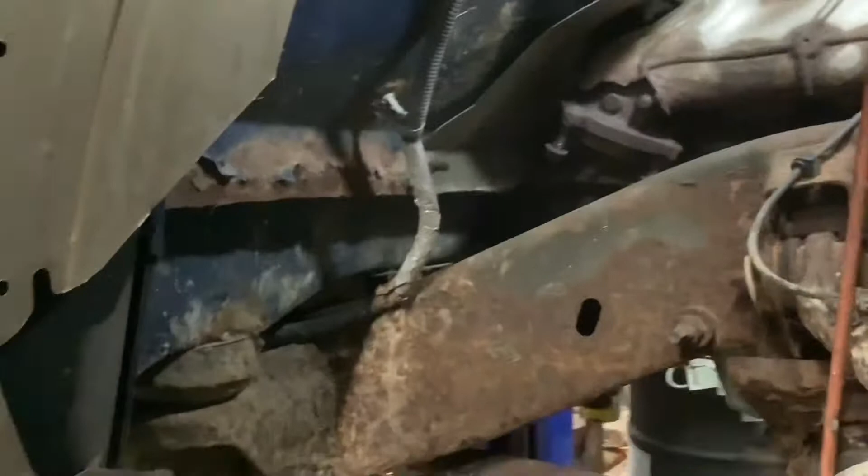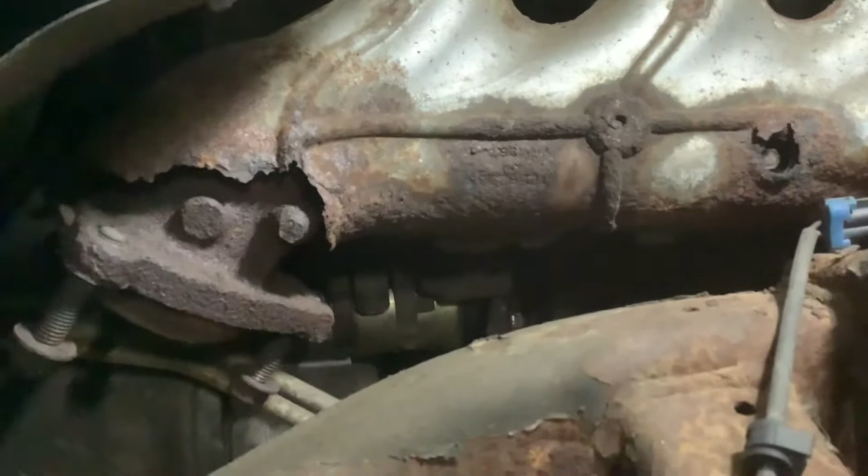Okay, here we are back with this 76,000 mile Michigan truck. I took this inner fender well out because it's easier to get to the starter. I got it up in there and the wiring is very tight, so I prefer to put the starter in and then hook up the wiring. You can see that stud is empty right there and the nut is loose.

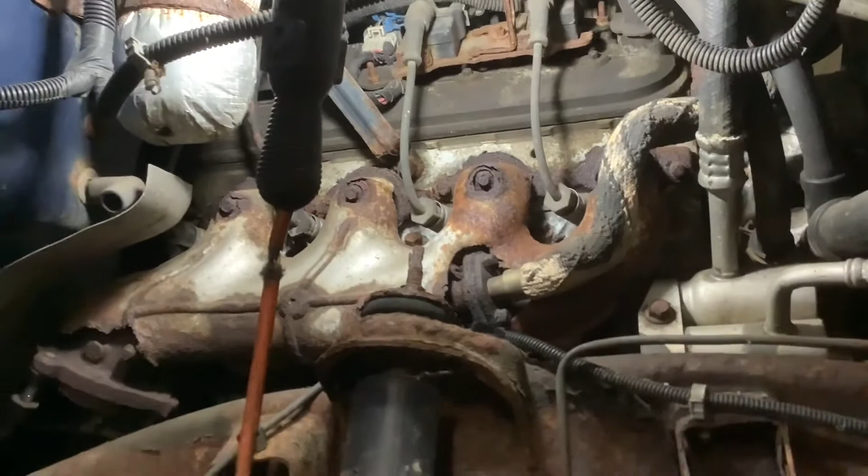I decided before I pull that rear end and swap it with the one sitting on the floor, I'd like to get some fluid in the transmission and start this thing up to do a baseline on the rest of the truck. Remember there was an idler pulley on the belt drive making noise, and who knows what else might go wrong. So I just want to get this thing started, let it run for a little while in the shop, and see how it goes. I need the starter, the exhaust put together, and fluid in the transmission. I'll check all the fluids in the engine, coolant, oil, stuff like that, and then we will get going.

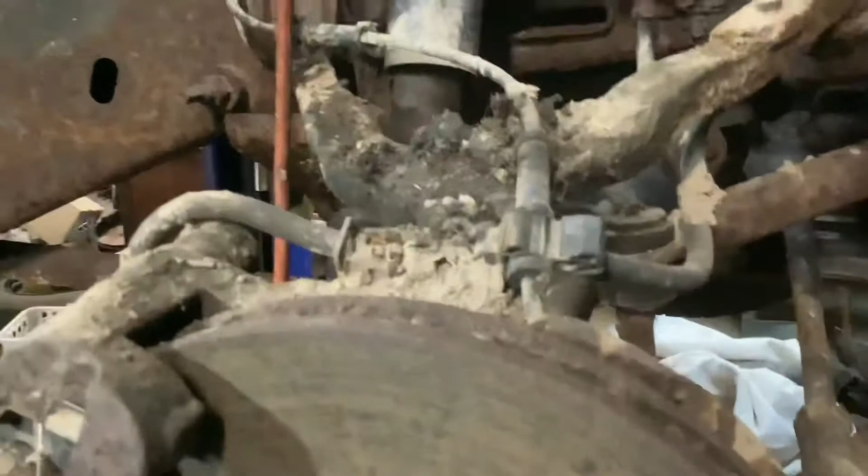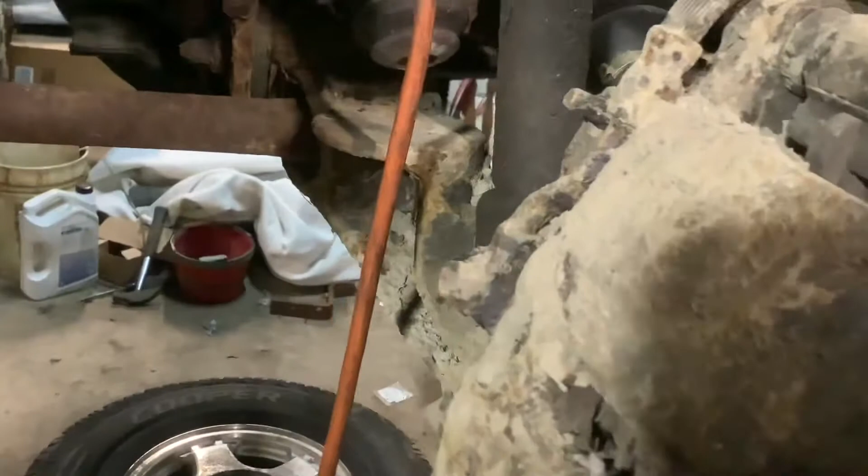I did mention that this truck was out in the field one of the last times before it was parked, and I probably should have washed all this mud off. The bleeder screw is gone. The brake hose is in poor shape, and I will replace that at a minimum before I even try to drive this on the road.

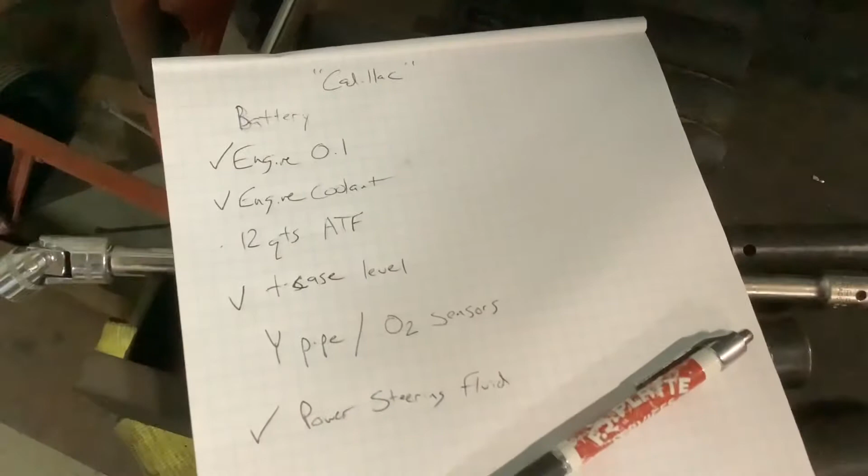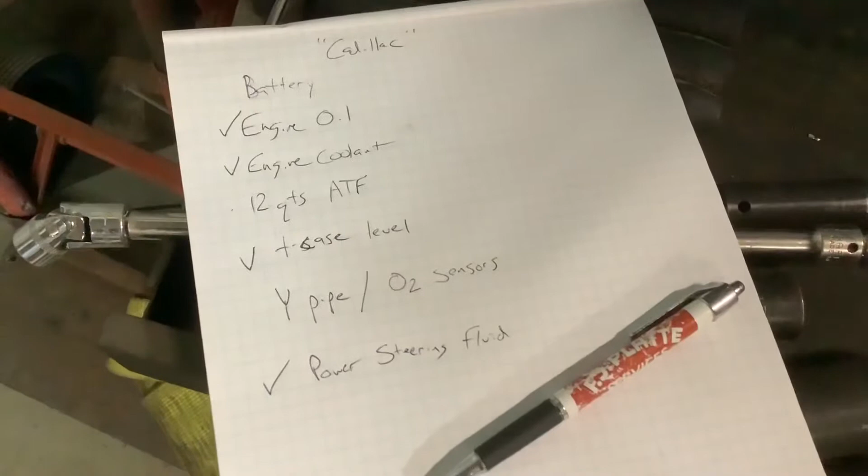So that's that, and there we go. There's my list of things to do for the Cadillac. I've got to do the battery, check engine oil, check coolant, put in the transmission fluid, check the transfer case level, hook up the exhaust, check the power steering fluid.

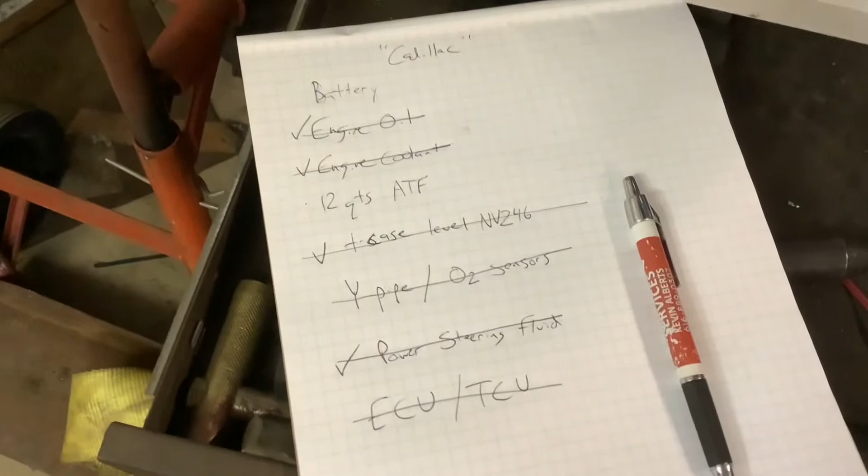I have 8 quarts of transmission fluid in it, and I have to put the battery in and see if it'll start before I finish filling the rest. I want to be able to burp the system and not act like it's over full trying to pump it up.

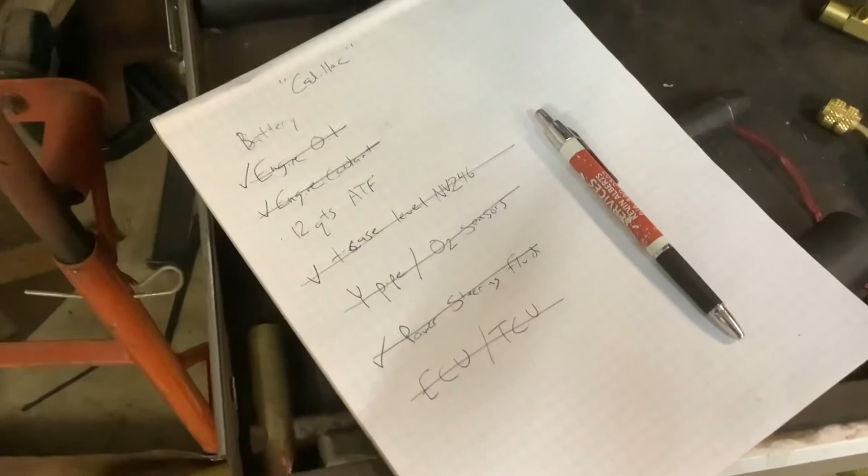All right, this is the moment of truth. The battery's hooked up, and so far there's no evidence that mice have totally trashed the wiring, because I heard a click inside, but I didn't hear anything scatter or any smoke going out. So it's time to crank this thing over and see what happens. Wish me luck.

Well, that wasn't the smoothest running engine I've ever heard, but it has been sitting for a very long time. I didn't have any check engine lights or anything like that, so I'm going to check the fluid level, top it off as needed, and keep going at the project.

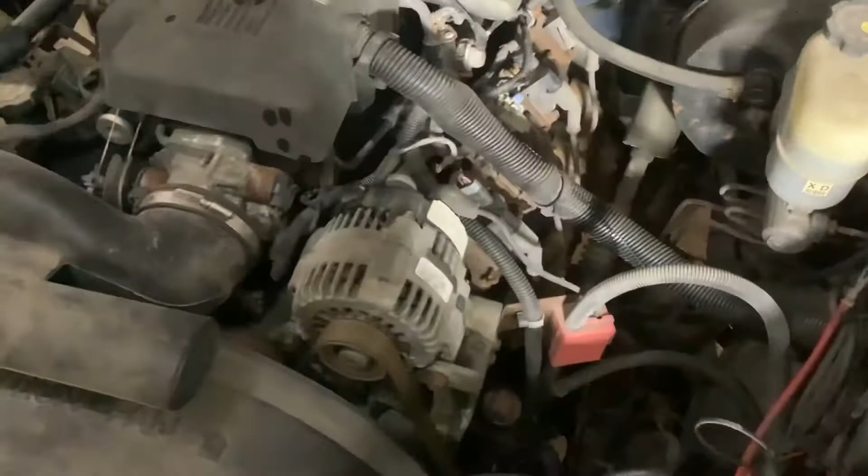Well, all that noise when it started up the first time was because this outside manifold bolt is broken. Now that it warmed up a little bit, that noise went away, and I'll most likely add a set of JBA stainless steel shorty headers to the list of things to grab for this in the long run.

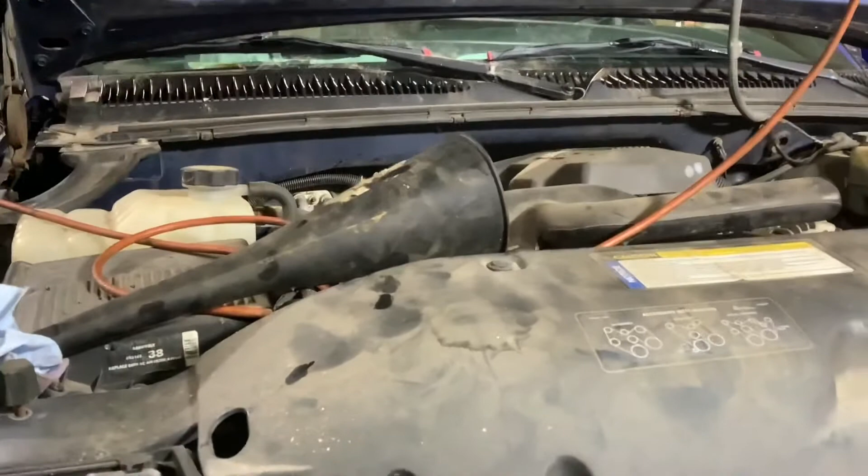Well, it ran long enough for me to get the transmission topped off, and all is well with that. It's starting to get a little stinky in the shop, so I'm going to wrap it up for the night and get some fresh air.

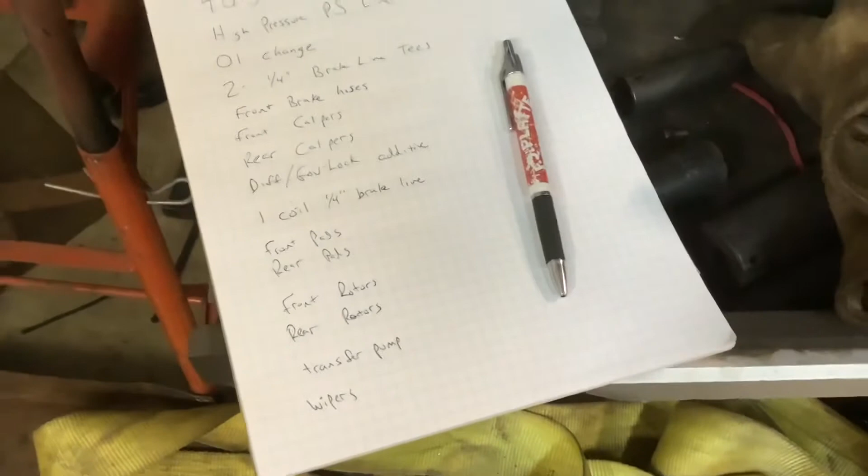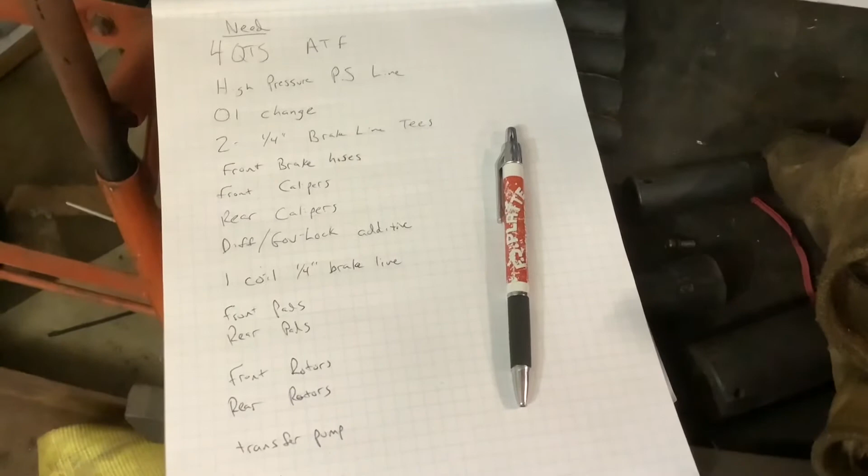I made a short list of things that I need to grab for this, and some of it is necessary, some of it is just because I would like to. The pads have good wear left on them, but I'd like to do new calipers and new rotors, so I might as well just do the pads too. I have a leak on the high pressure power steering line, and just some maintenance stuff needs to be done. Otherwise, this is looking promising.

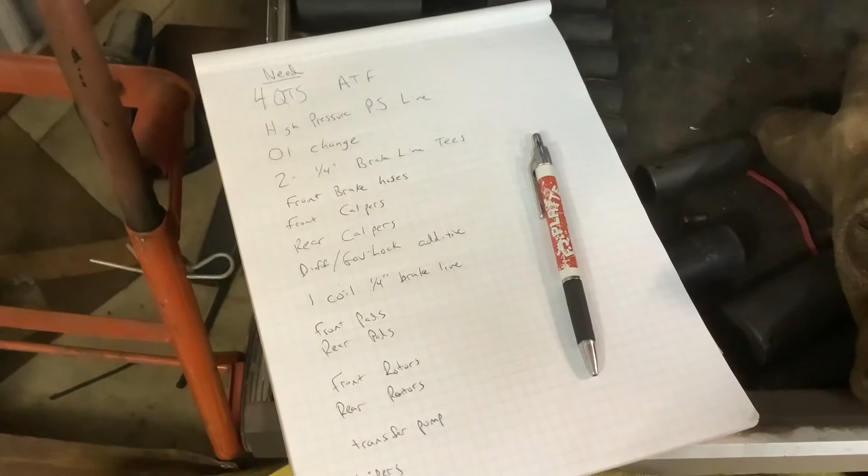I'd like to get this thing wrapped up in the next week or two, and have a spare truck with a plow on it for the winter. I do have some brake components here that are labeled for an Avalanche, an 03 Avalanche, so I'll do some cross-referencing and see if these will fit this truck as well, being a 99 half-ton Silverado. That would make things a little easier on the pocketbook.